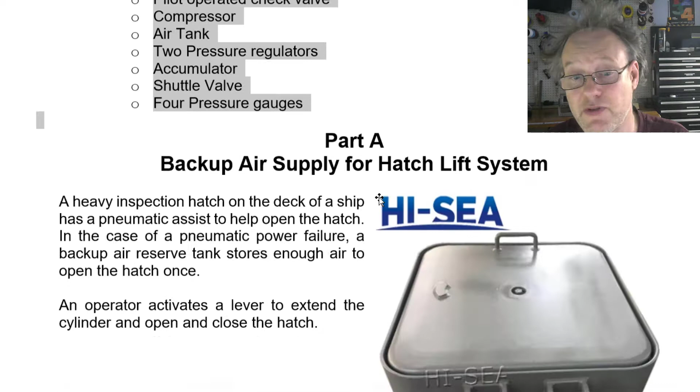Okay, here we go. So let's take a look at the lab. Here's all this equipment. Let's run through this and see what's going on. Essentially, we've got this heavy hatch that's got to be lifted, and we have an actuator system that's a pneumatic actuator with a lever, and we can move the lever on a DCV and control the hatch. It's really heavy, and it's important that we have that extra help.

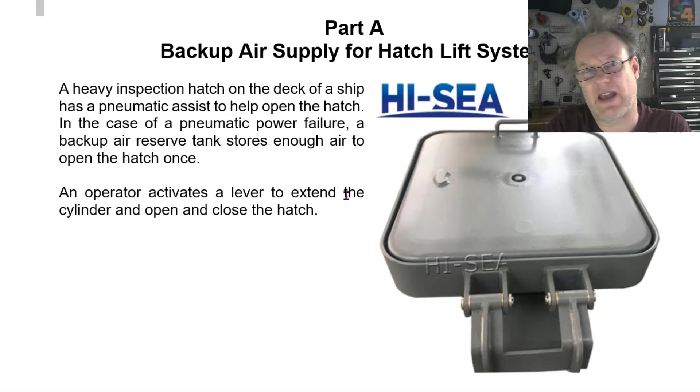What happens if the power goes out? Essentially, we're going to deal with the power going out next. But right now, just for safety, in case the DCV dies or anything in the system dies, what we're going to do is put a pilot operated check valve directly connected right into the actual cylinder.

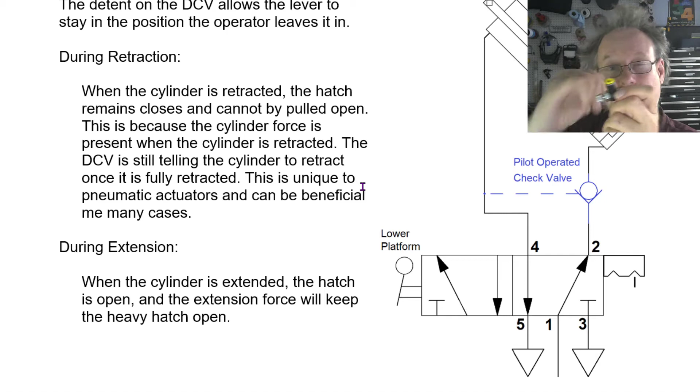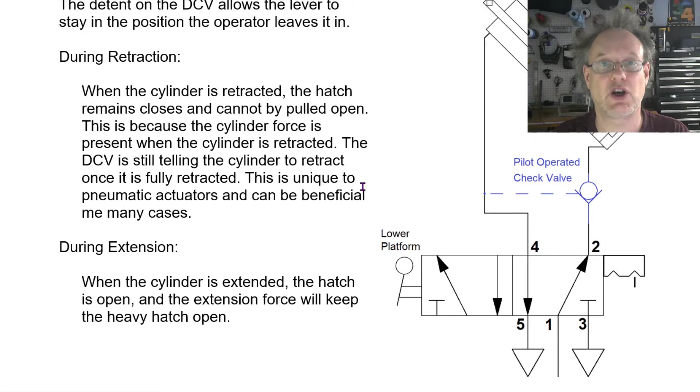This is not a pilot operated check valve, but it's the closest thing that I have. It's threaded right here, so it goes right into the cylinder, and there's a port here. A pilot operated check valve would actually have another port coming out of it that would go in. So this is going to be right at the cylinder. If anything fails after this, if the line from the cylinder to the DCV fails, or if the DCV fails, the air can just vent out and that cylinder can drop, and that big heavy door could come down possibly on somebody's head. So we're going to put a pilot operated check valve in there for safety.

Now what we're going to do is take a look at this air backup. Okay, so I've got this cool circuit here. I've built it in Automation Studio. The purpose and function of this whole lab is for you to build this in Automation Studio. So let's take a look at what's going on. We've got this guy, and I've got a DCV here with a lever on it. I've got this cylinder, so it's lifting the hatch up and down. I've got a bunch of other stuff in here.

Before I even talk about the backup air supply, I want to introduce to you a compressor and a tank. We're going to study compressors a little bit later, but right now I just want to give you your first look at how this actually works. Here we go, there's our compressor and there's our supply tank. In the discussion below, we're going to see how we put the settings on this. We're actually going to set the volume of this tank, and we're going to set some attributes to this compressor.

So there's also another compressor up here, which is our compressor 2. It's our backup compressor. And there's also a pressure regulator here—sorry, I forgot to talk about this pressure regulator, there's one here as well. And there's an accumulator here.

This accumulator is just kind of like a small air tank. It's going to store enough pressurized air, kind of like a backup battery, that's just going to allow this cylinder to extend one time to lift that heavy hatch. So there's a bunch of valves in here, and I'll explain those and how they work as I demonstrate this to you in Automation Studio.

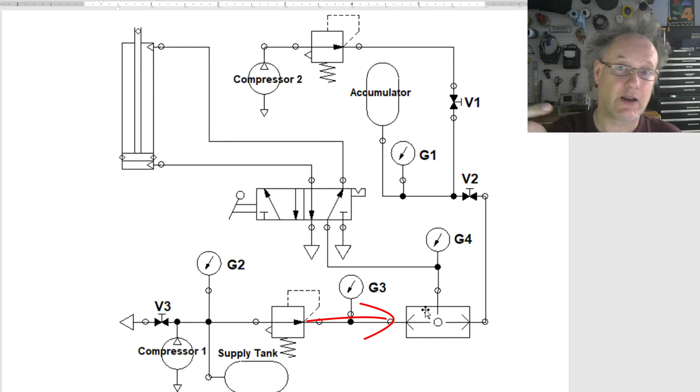Just bear with me for a sec. Let's take a look at this shuttle valve. We've studied shuttle valves, but we didn't really get into applications much. So here you go—welcome to the concept of a shuttle valve. What a shuttle valve is: we have air coming in from one side, air coming in from another side, and then air coming out. The air that goes out will come from whichever side has higher pressure.

So for instance, this is a gauge, by the way. If gauge 3 says, say, 80 psi, and this gauge over here, gauge 1, says 70 psi, then I'd have 70 psi on this side of the shuttle valve and 80 psi on this side of the shuttle valve. So the air from here would win, it would come up, and my gauge 4 would actually say 80 psi, because it's getting air directly from here.

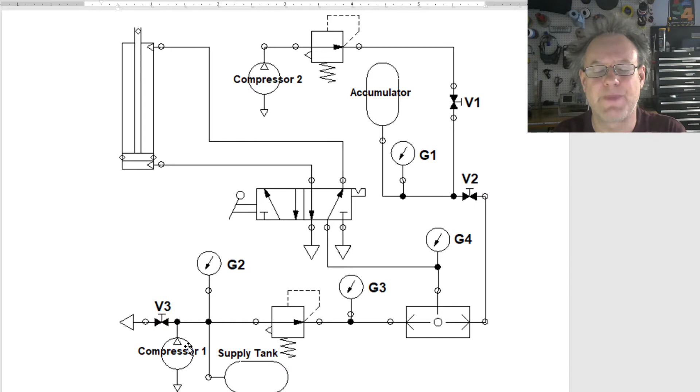If, for some reason, my main air supply died—this regulator got broken, or maybe my tank blew a hole in it, or this line broke down, or my compressor actually died because I've lost power somehow—and all that pressurized air is vented out, what am I going to do? That hatch is so heavy, I'm going to need like 2 or 3 people to lift it up. So I'm going to have a backup air supply.

What I'm going to do is turn this valve here. These are just shut-off valves—ball valves. These are just on or off; they allow air to flow or not to flow. There's no in between. What I'm going to do is turn this on, or make it open.

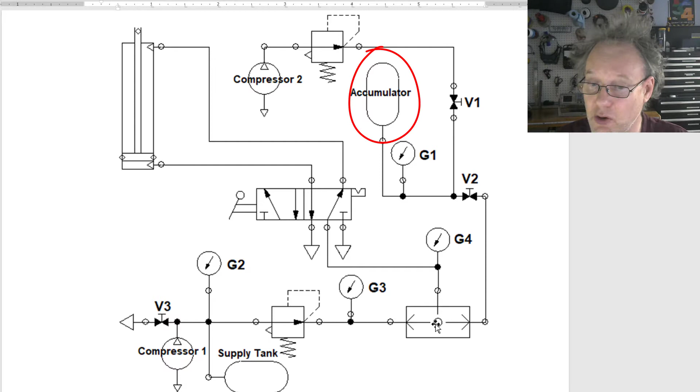So now my pressurized air from my accumulator is going to come in here. It's going to go to the shuttle valve, and because on this side I've lost all my air, there's no pressure over here. So the shuttle valve is going to move over, and now the air will come up here, and this gauge is now going to reach 70 psi. I can then move my DCV, and I can make this cylinder go up and down.

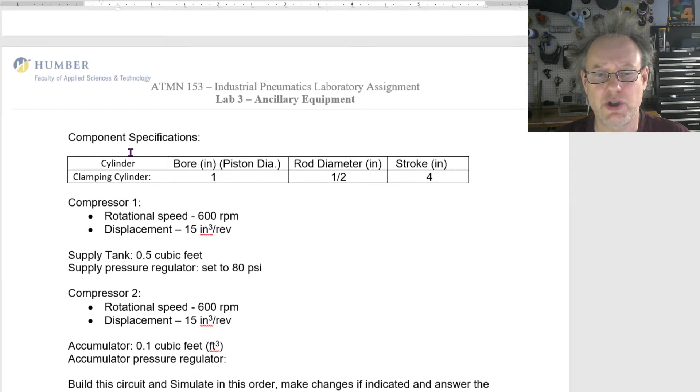So what you're going to do is, when you build this in Automation Studio—and I'll show you how to do that in bits, not entirely—you're going to go into your compressor and set these levels, and also into your compressor 2 and set these levels. We've also got a pressure tank, our main pressure tank, this guy over here. You're going to go in there and set its volume to 0.5 cubic foot. It's pretty small, but for this demonstration I want things to pressurize really quickly and not sit there for 4, 5, or 8 minutes while the compressor fills the tank completely.

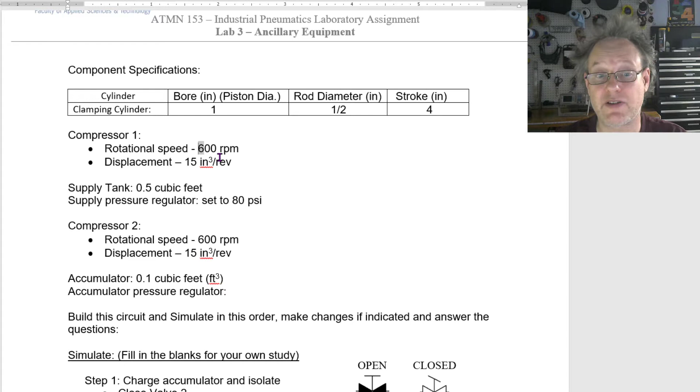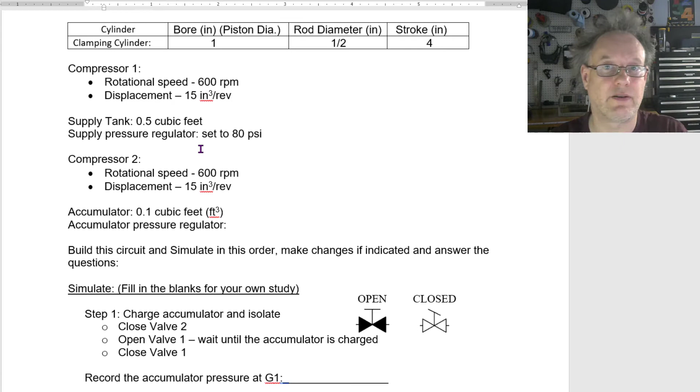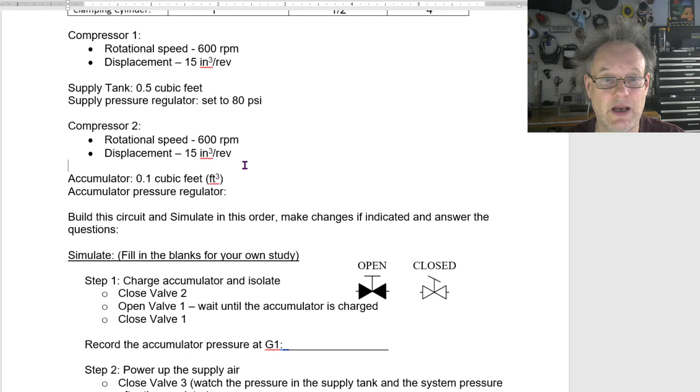So we'll just make it a tiny little tank. And actually, my compressor is at a pretty low flow rate as well. We're going to study compressors much later, so don't worry about these numbers—just set it to this value, and it'll make the simulation work for us. There we go. Set your accumulator to this guy here, this little tiny air tank—it's very small, 0.1 cubic feet. The accumulator pressure regulator is going to be set to 70 psi, which doesn't say here.

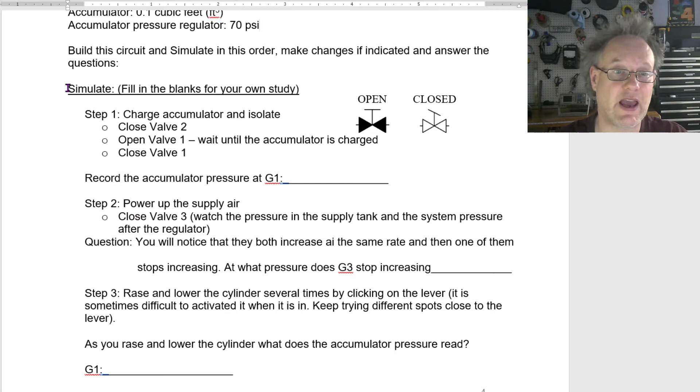Moving forward, this is a step-by-step way to simulate it. I'm going to show you how to simulate it and we'll check out what's going on. There are different levels of simulation so you can really get a better understanding, or you can simulate it yourself to fully understand how the backup system works.

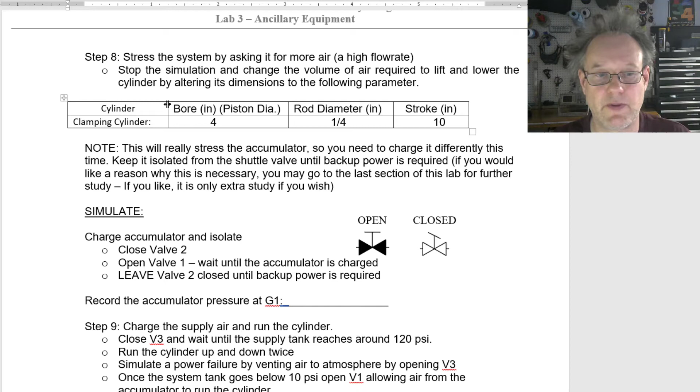If anything, I'll just do it for you right now and show you. Here we go, I've got the Automation Studio file going. I'm going to run it for you first, then show you how I got each individual part and where I got them from, so you guys can build this. So let's simulate this.

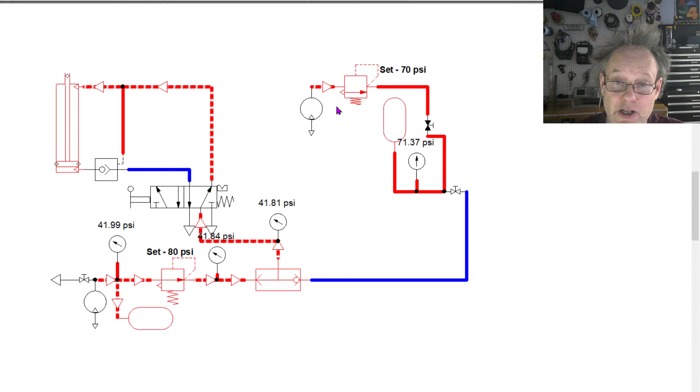What I'm doing right now is this valve is closed, this valve is closed, and this valve is open. The air pressure from the compressor here is going through here, through this regulator, which is set to 70 psi, and it's filling up this accumulator.

Now the accumulator is full. I can pretty much remove this - it could be a portable compressor, or I could just run a line from this guy and put it over here, a little backup portable compressor. Might take a few minutes, doesn't matter. What I'm going to do is pressurize this guy and just leave it like that for a long time, because it's my backup.

I'm just charging that extra backup battery and sticking it in the cupboard in case I need it. So that's just going to sit there and stay charged while I'm using this the whole time - could be days, weeks, months, or years. I might want to check it to make sure it's pressurized, kind of like how you'd put a spare tire in your car and check the pressure every once in a while to make sure there's still pressurized air in there.

Here we go, let's take a look at what's happening here. I have my pressure tank here - this is my compressor tank system, and my tank is actually small, just 0.5 cubic feet. It's a small tank. I've got my pressure regulator here.

Anything after this pressure regulator is pressurized up to 80 psi, and we can see that there. Before that, I've got my compressor here, chugging along, going up and up and up. I don't have a control on here - I don't really need to put control into that compressor right now, because we're not bothered with that. We're just focusing on putting in a backup power system.

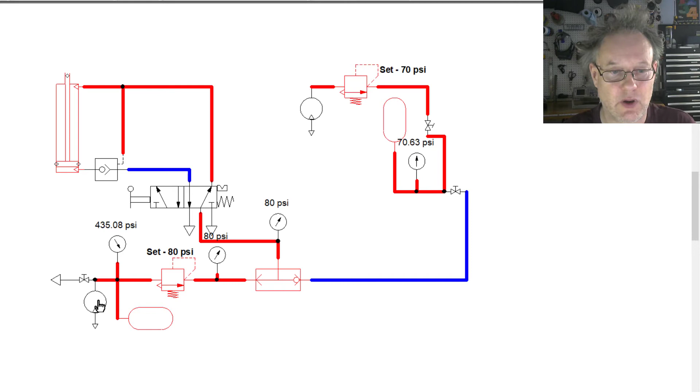So there we go, I'm just running my compressor, going and going and going. And I've got really high pressure over here - it's now pressurized to its maximum, 435 PSI.

What I want to do is run this. I've got my pressure regulator here - really high pressure on this side, low pressure on this side. Anything past here is going to be 80 PSI. Now, because this shuttle valve is seeing a higher pressure on this side, that 80 PSI is coming up here, and it's going to here, and it's going to here.

If I open this, the 70 PSI will be seen here. Watch this - the 70 PSI is seen here, but it's not shuttling the valve yet. When it does shuttle, you'll see this little ball move over to this side - when this side gets higher than that side, the ball moves over. So this guy's 70 PSI. I'm going to shut that off because that's our backup - we don't want to have that there unless we really need it.

So what's happening now is I'm going to run this a few times. I'm just going to click on this, it'll go over, and I'm going to show you how to build this valve a little bit later too.

So I'm going to click it again and it'll go back. This guy is going back and forth, and I'm running this and everything seems to be running okay. Now this guy, if you notice, the pressure went down a little bit. That's because I'm using the air.

If I press it further, I'm just going to show you this for now. It's really cool. Maybe this will give you an idea of, when we get into compressors, why flow rate is so very important, why we actually bother calculating the required flow rate so that we can select the right compressor. I'm just going to run this a bunch of times. Watch the pressure at the compressor, this 380, it's going down a little bit.

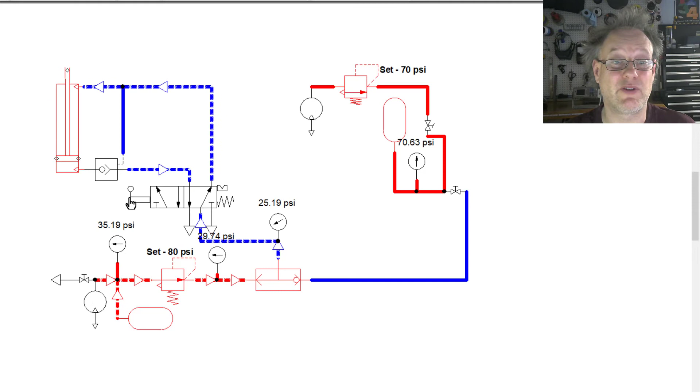So we have to put a bigger compressor in there, but we'll figure out how to define what kind of compressor we need when we get to study compressors. I just thought it would be neat to show you that.

So we'll just let this guy pressurize up, and this tank will start to fill. On this side, as soon as we get 80 PSI on this side, 80 PSI is going to be on this side too. Now what I want to do is simulate the compressor going down. So this guy is 80 PSI, and it's going to stabilize and stay that way because my pressure regulator is doing that.

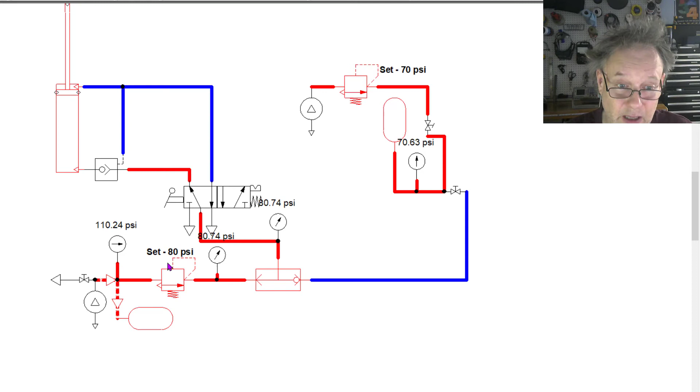But what I'm going to do is open this up and simulate a failure. Right now, all of this air is venting out here. I'm losing air in here. We can see that the air to the right side of my pressure regulator is also dying as well. So essentially what's going on is that all of the pressure is leaking through this guy, and there's no pressure. I've just lost everything, but I still need to open this hatch.

It's a big heavy hatch. So what I'm going to do is turn on my backup supply. I'm going to turn this guy on, and I've got air coming in here. Air is available. What I want to do is lift this up.

So when I lift it, watch this. Did you see what happened? This was 70. It went down here and it went into here and into here. What's going on is that this guy is one big accumulator. This is an accumulator and that's an accumulator. So what just happened was the air that was in here got shared in between here and here.

Okay, so now that means my pressure went low. I've got 49 PSI left. Is that enough to lift it? Well, you've got to do your designing. You've got to figure out how much force you need, how large your cylinder is, and then you've got to say, okay, hopefully that's enough. That gives me force to pick it up. If anything, it's going to help me physically lift it if I need the extra help to lift the heavy hatch.

There you go, so it's gone up. Now the pressure is really low, it's gone down to 28. Let me lower it again. Okay, now the pressure is really low, it's like 13. I don't think it's going to go up all the way again. It's just going up, it's probably not going to come down.

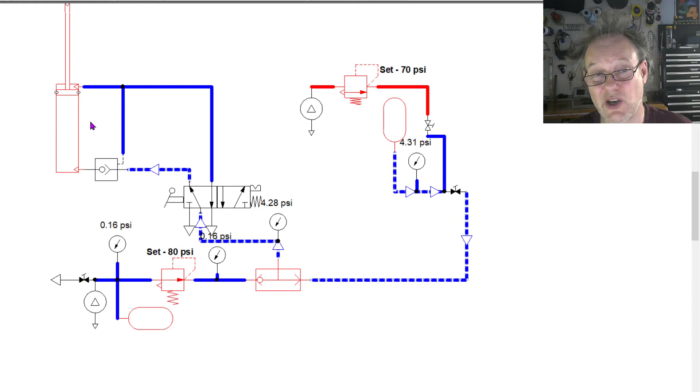Let's just do that one more time. What I'm going to do is turn this off. I'm going to stop this leak. This guy's going to pressurize. I'm going to wait till this is 80 psi, and then on this side it'll be 80 psi too. Then I'm going to run this a few more times. Maybe I'll let this go up to 120 psi, and then run it a couple more times.

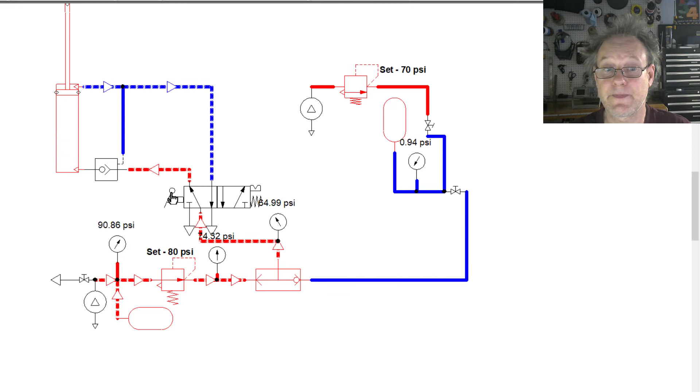And we'll see. Okay, good, we're getting there, 80 psi. Nice, 80 psi, that guy's going up and up and up. Okay good, so I'm going to run this now. This goes up and this goes down. I'm running it, it's not a problem. We can see that this pressure is compromised a little bit. So we may actually want to get a different compressor if we're going to run it this quickly. But for now, we're just saying okay, it's working.

Now what I'm going to do is simulate a failure. Bam, okay, now my pressure's gone down. I'm losing everything. Actually, there's pressurized air in here, this is like an accumulator. There's pressurized air in here and we can see it's venting. Now the air in here is at atmospheric pressure.

I'm going to do this. I'm going to turn this on, and that air is going to come up in here, up in here, up in here, and it's going to fill this back up and pressurize that area. Ready? Here we go. I've just opened this guy up.

Wait a second, oh I've got no pressure in here. Right, I forgot to fill this again. So I'm going to make sure that this guy is closed. I'm going to fill this. This is good because you have to simulate this yourself. I'm going to fill it up, make sure it's full because, you know, I just used it, so I better fill it up again. There we go. Now I'm going to open this up.

I'm going to have this coming in here. This is going to go low, because all that extra pressurized air went from one volume and shared into these two volumes. So this is like a little accumulator.

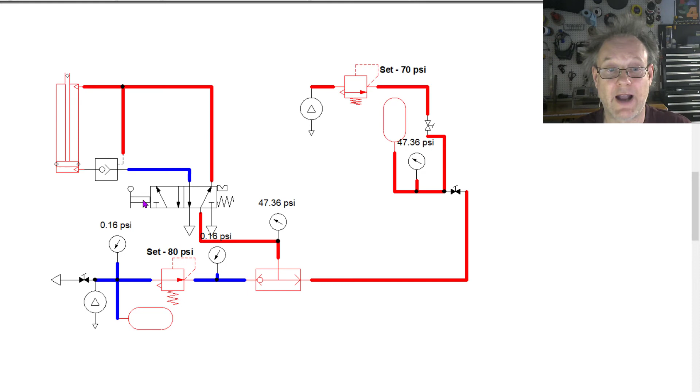Now I'm going to run it. Now I've got 47 psi, that's going to help me lift it. It's a heavy weight, it's going to go up there. Now I've only got 26 psi left. I'm actually going to lose some of that, lowering it. Now I've only got 12 or 11 psi left. And as soon as I start using that, it's just going to get low again. And it's going to raise, but essentially there's a big heavy weight on here, so it's not actually going to go up.

So we can say that that's it, we got one try out of it. So there you go, that's essentially what's going on here. We have this option of running this cylinder at least once to help us open that hatch.

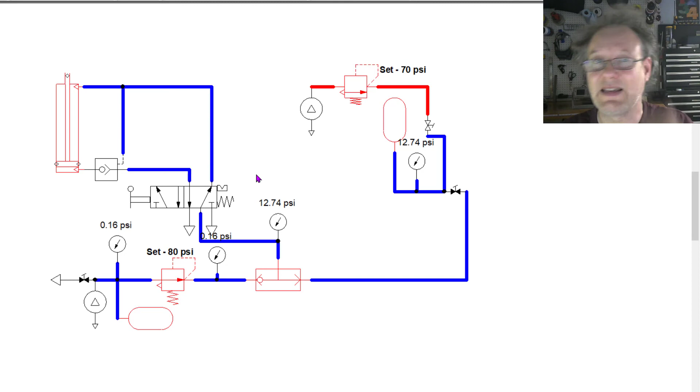Now I'm going to shut this down and show you where I got these components. First of all, I'm just going to kill this guy and let's make him again. I'm going to go over to pneumatic, over to actuators. No, I'm going to go to directional control valves. I'm going to go down to my 5/2.

What I want to do is grab a valve that's got two things on the right side. Two things on the right side - there we go, that's got two things on the right side. So I'm just going to put that in there. Perfect, I got to go in there. No, I'm just going to undo that because I didn't put it in the right place. Got to get it just bang on. Perfect. Now I'm going to click on this guy, go to my builder, technical specifications.

What I want to do is turn this into a detent. I want to turn this into a detent, and my detent, what it does is it actually keeps the lever wherever I put it. Now I've just changed this.

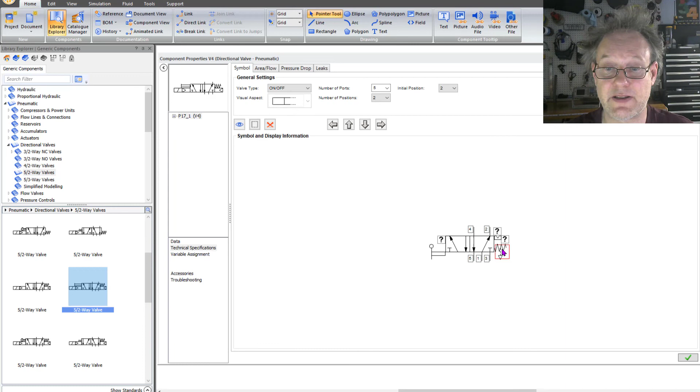I'm going to change that to a lever, and I'm going to get rid of this guy, and I'm going to put a spring on here. Whoops, that's an adjustable spring - I just want a normal spring. There you go, so now I've just made that valve.

I'm going to say okay, and close it, and there you go. If I didn't have that spring, this lever wouldn't go back. Let me just simulate this. Okay, there's my lever. Now I'm going to click this and the lever will go back.

If I got rid of this spring, and I just said gone - dude, the spring didn't go away. If I got rid of that spring, delete, please and thank you, yep. Then what's going to happen is that my lever won't actually return. I can get rid of my detent as well, but it won't go back. Oh, it did go back. There you go.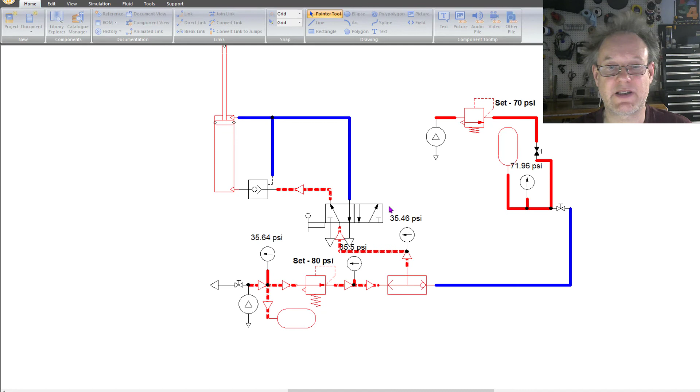Doesn't quite click properly, but I think it's because the detent is gone as well. That detent really should be there, so it's difficult to bring it back. It's not really working very well, so you want to put that spring in there.

Now, where do you find all these other components? Well, you just search around for them and look for them, but essentially what I'm going to do is go to compressors. I'm going to grab this compressor and put it in there.

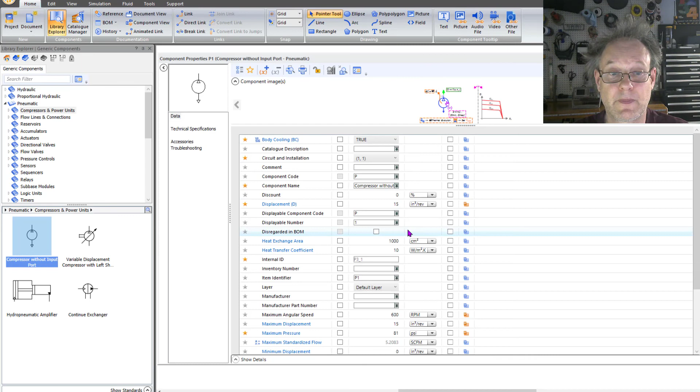Now click on this guy and you can see all of these settings. What I'm going to do is click on this guy and show you what I did over here, and let's also take a look at the lab sheet.

So I've got my lab sheet here. Compressor 1 is set to 600 RPM, so I've set that to 600 RPM. And also it's 15 cubic inches per revolution - that's what you got to set it to.

So there you go. Now let's take a look at the tank. I'm going to click on this guy and we can see the volume of the tank is 0.5 cubic feet. And you can do the same for these guys - the specifications for those are on the lab as well.

And set the regulators. To find that regulator, you go down here and say, where are the regulators? What do I do? Flow control, pressure, pressure control. Sweet, because regulators, that's what they do - pressure reducing valves, and here we go. That is my pressure regulator. So I can put one of these in here. Pressure reducing valve, that's what it's called in Automation Studio, but we also call it a pressure regulator.

So you can drop that in, and these guys, you know what, I'm gonna leave you to search around to find. The shuttle valve, really cool - so we're gonna look at flow valves and look at others, and we go for shuttle valve, and we go there. So there you go, there's your shuttle valve. You don't have to make any settings for that. So I think you can build all of this.

Oh, this guy's important - where do we find a pilot controlled check valve? Go into flow, go down to here, non-return valves, and there you go. So now you've got all the components. You know where they all are.

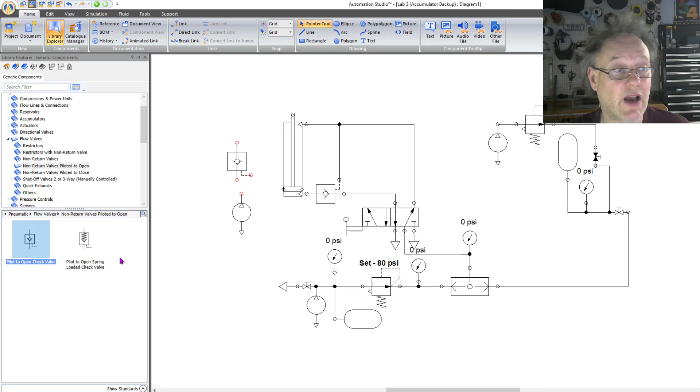Build this thing. What I want you guys to do is label all of this stuff properly, like I had here. All of these things, put all of these labels on. Plus, because it's a proper circuit, I want you to label all of the ports on here as well. And it's also good to put a label on to - I've got mine labeled at 80 PSI and then set to 70 PSI. You should do that as well.

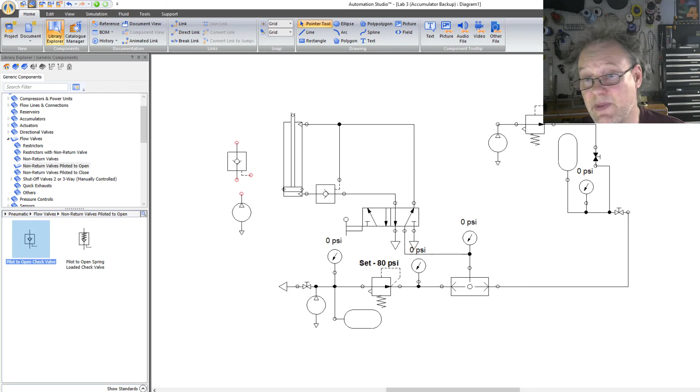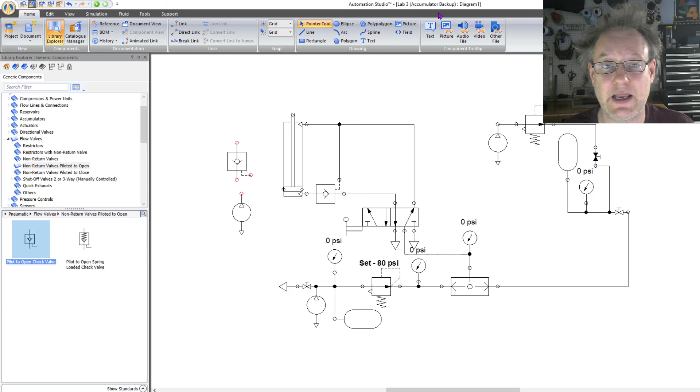So there you go, that's the lab. You know what it's all about. You guys know how to build this. You know where the components are anyway. Put it all together. I would suggest that you grab valves - grab another one of your circuits that you've built with all of the valve numbers already put on them and some text there already. Just grab that and open it up. Save it as this and start deleting stuff that you don't need and add all of this. There you go, have fun.